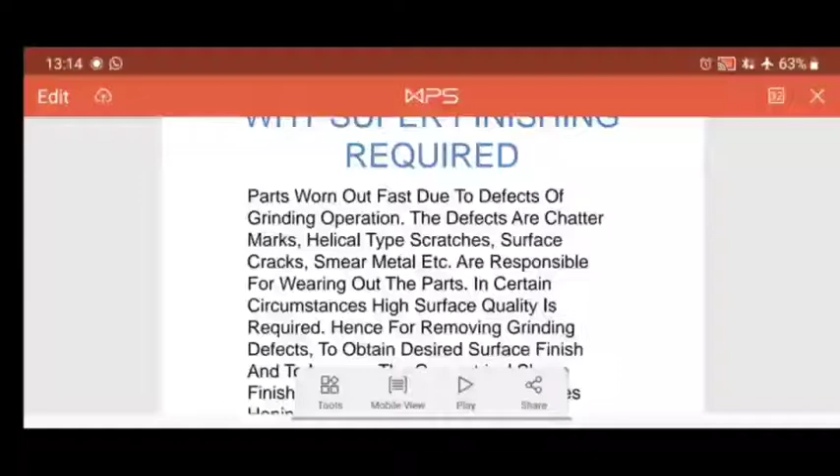So today in this video we will be discussing the super finishing process. So first of all, what is the super finishing process? Can anybody answer? Okay, the super finishing process is nothing but a process in which you get a better finish. So let's discuss what super finishing is. The super finishing process is nothing but a process of making the particular material acquire the best finish.

So basically why do they do this super finishing process? There are different types of super finishing processes. The first one could be honing, the next one is lapping, the next one is micro finishing or super finishing, the next one is buffing, and the last one is burnishing. So basically they do it to make that particular material get the accurate size and also a high degree of surface finish.

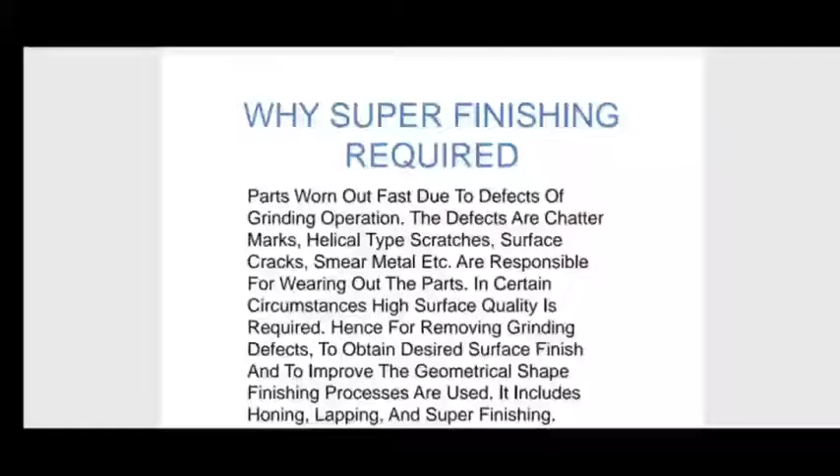So if you take a nut or bolt, when you buy it from the shop, the finish of the nut will be nice. It will be very glossy. It will be very shiny. When you start to use it, it will start to change color and rust will form. So many things will happen. So when we buy any new thing, at the time we purchase it, it would be very nice and very glossy like that. So that is called the super finishing process.

So parts wear out fast due to defects of grinding operations. The defects are chatter marks, helical type scratches, surface cracks, smeared metal, etc., which are responsible for wearing out the parts. In certain circumstances, high surface quality is required, hence for removing grinding defects to obtain the desired surface finish and to improve the geometrical shape, finishing processes are used. It includes honing, lapping and super finishing.

So basically when we take any material, scratches will happen, and scratches are very disturbing. Even when we buy a car or a new bike, if we get a single scratch, we will feel very bad, right? We will feel very unhappy because the product should be very nice and very clear so that the looks will be good. So that is the super finishing.

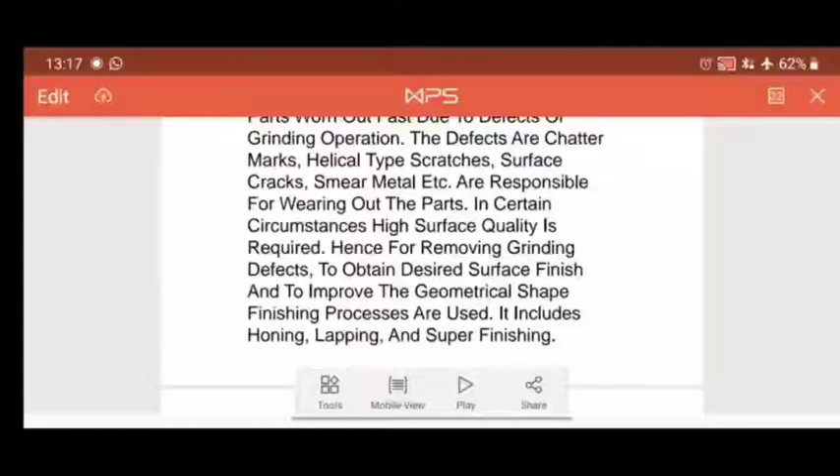When very close dimensional accuracy is required, in addition to high surface finish, the following operations are performed. The first one is the special grinding operation, a process we would have studied in the grinding subject. It shows how the grinding operation is done, and how excess material is ground out of the material to produce the final product.

Next is lapping, a technique we will discuss later. Then there is honing, and next is super finishing.

Whereas in some cases, the primary requirement is only a high degree of surface finish, on the higher side, where only high surface finish is needed. So the desired surface finish is obtained by polishing, buffing, tumbling, and burnishing.

Polishing, everybody knows, basically polishes the material. For example, even if you take a shoe, you get shoe polish. Why do we put polish on the shoe? To get a glossy finish. So on that basis, this happens.

The next topic is the different types of grinding operations, which we already discussed in chapter 4, the grinding process. The important surface finishing operations will now be described in this unit. Typical surface finish operations include honing, lapping, super finishing or micro finishing, buffing, and burnishing. These are the steps we are going to discuss.

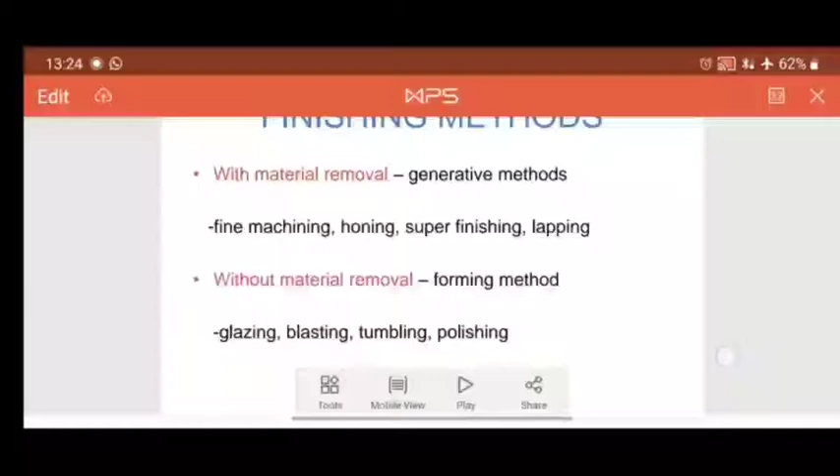Honing is defined by common practices. In that sense, honing is a specific machining and finishing process, usually applied to internal cylindrical surfaces using small bonded abrasive stones. So basically it is used for small bonded abrasive stones. That is the honing process.

Next, we will discuss more about the honing process. So this is honing. Holes made by boring are obtained to the required dimension and finishing by honing. In this process, abrasive stone is used. The dimension, to an accuracy of 0.005 mm, can be obtained by the honing process.

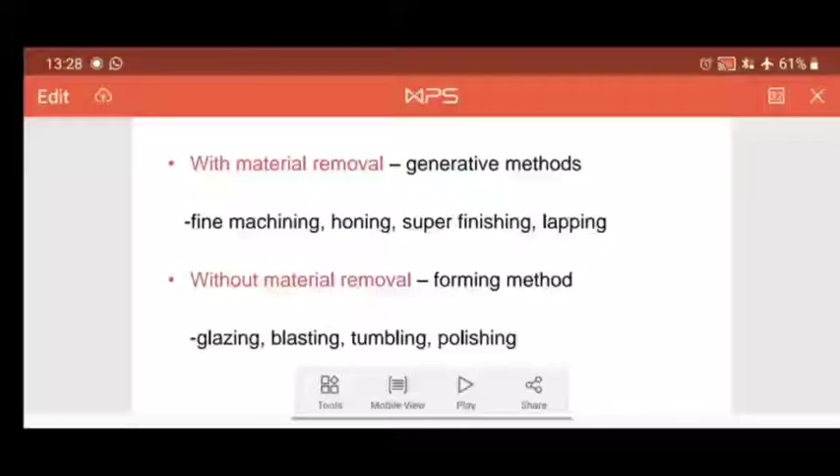Basically, by using this honing process, it is not only meant to do the boring. It is used for boring work where the diameter is very less, but at a lesser dimension also, they are able to do the process. So, using a fixture that rotates and reciprocates, honing is used to correct the geometry and alignment of holes, as well as apply a special surface such as that needed in automobile engines. Basically, this honing process is helpful in order to correct the geometrical alignment of the hole.

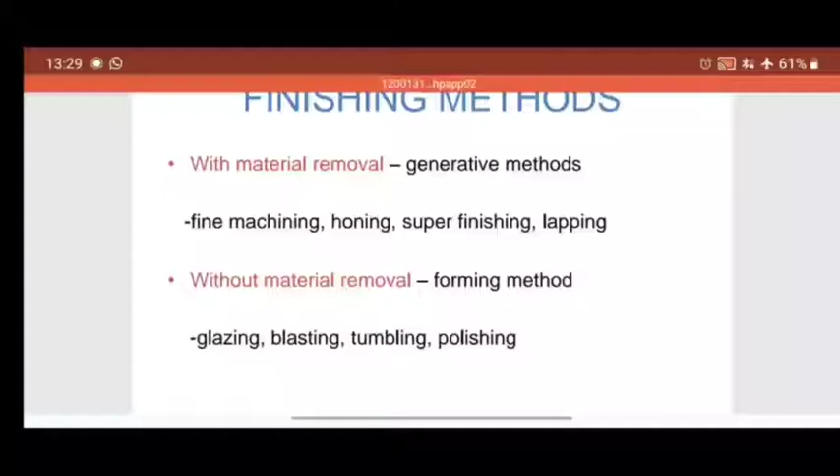So when you take a bore, if you take a bike, there is an engine. In that engine, piston, bore, everything is there. In that engine cavity, the piston will be moving up and down. The piston has a cylindrical shape, and the hole also will have a cylindrical cavity, cylindrical shape, and because of this hole, the piston will be moving up and down. So in this case, by using this process, the hole can be drilled properly so that it can be achieved with good precision.

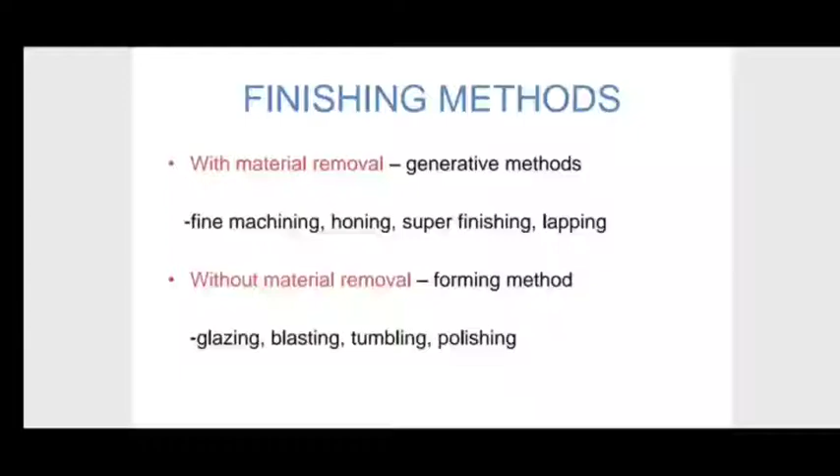Next, the force per unit area varies from 10 to 100 times less than grinding with wheels, and the abrasive grains remain in contact with the workpiece for considerably longer times. Comparable processes include superfinishing, where small stones and light pressure are applied on both ID and OD portions of cylindrical parts. Honing is an abrading process carried out at a low velocity with the help of bonded abrasive sticks. Abrasive sticks is nothing but the abrasive stones. Commonly, it is employed for finishing round holes and curved surfaces. It not only produces a high finish but also corrects slight out-of-roundness, taper, and axial distortion in the work.

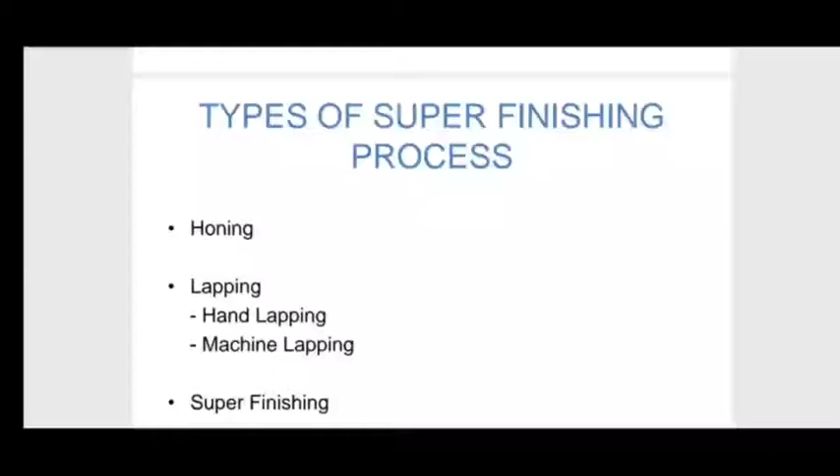Several objectives are achieved by honing. First, metal can be removed easily. Roundness and straightness are obtained, and accurate dimensions can be achieved using this method. A good required surface finish is also obtained by this process.

A high degree of accuracy and surface finish can be obtained, along with relatively high productivity compared to lapping. Because of multiple spindle machines, we can hone multiple holes at a single time, which gives high productivity. Industries prefer this because they require multiple devices to achieve results faster and save time, which is the main important benefit.

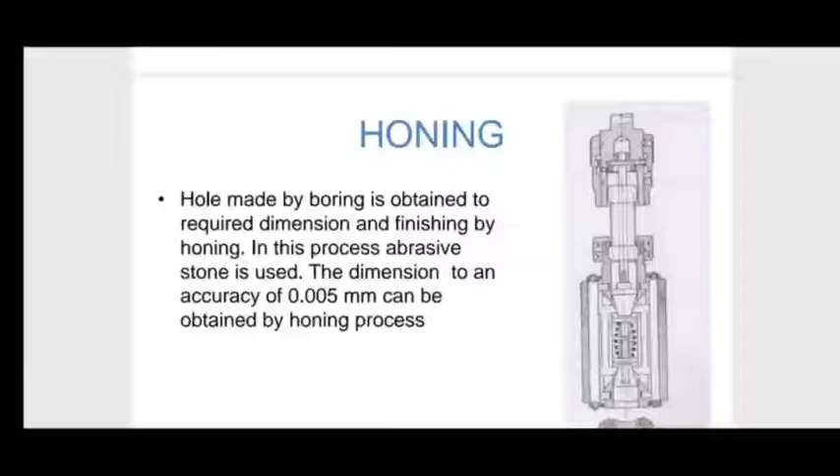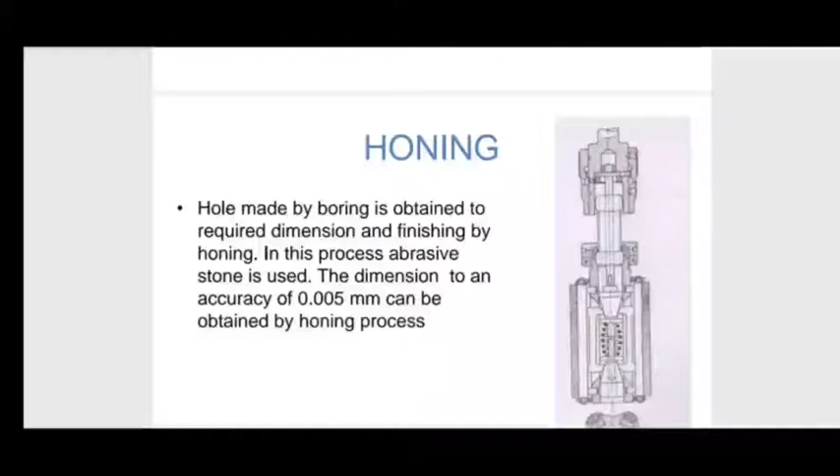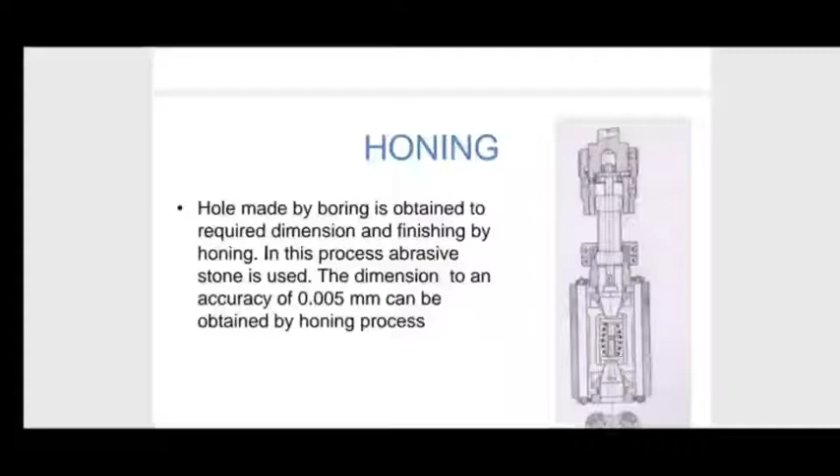There are some disadvantages when honing. Non-ferrous metals cause glazing or clogging of the voids of the abrasive sticks, making them difficult to hone. Honing works well on rough or hard areas, but when glazing occurs, it creates a big problem. It's important to focus on identifying glazing, since glazed non-ferrous materials are very difficult for the honing device to process.

The need for honing includes generating size and limiting accuracy. For holes up to 50 mm diameter, the accuracy is 0.005 mm, while for holes between 50 mm and 150 mm diameter, the accuracy is 0.01 mm. This allows accurate sizes to be achieved, which is one of the good criteria of this process.

So that is one of the new points. Next one is to generate roundness and straightness. Basically honing is used for spherical, cylindrical materials, right? So in that case, one of the most advantageous things is the roundness we can achieve and the straightness we can achieve. When you do cylindrical hollow tubes or a hollow pipe, we can get the straightness, because the waviness can be neglected when we use this type of honing.

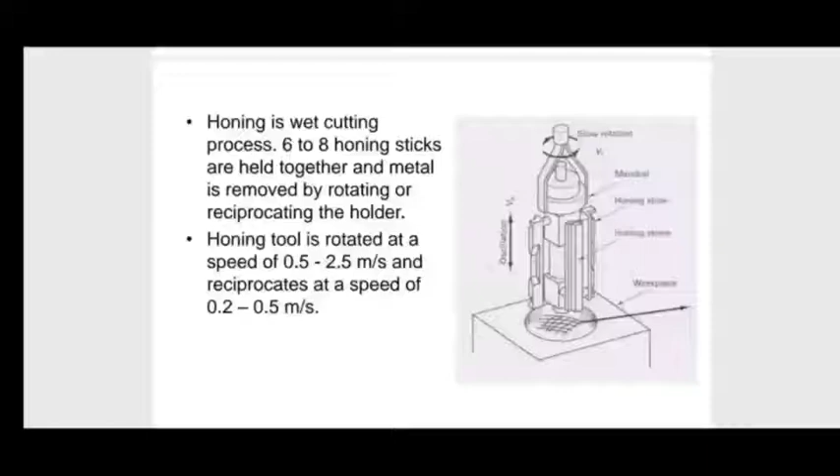To remove metal up to 0.5 mm for primary honing and up to 0.01 mm for secondary or mirror honing. So up to 0.5 mm for primary honing can be achieved, and up to 0.01 mm for secondary or mirror honing can also be achieved by using this honing process, to produce any required surface finish. As we require, we can achieve the surface finish.

Okay? And the applications: honing of automobile cylinders. Automobile cylinders are one of the most important applications currently available. Honing is also used for repair works, basically repairing cylinders, bores and all. Next one is the honing tool. So what is the honing tool?

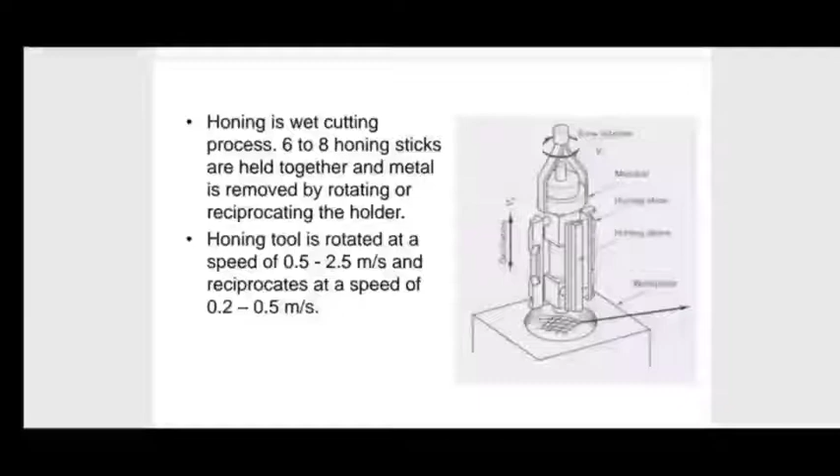It consists of a cylinder or body having 6 abrasive sticks. Now we are seeing about the construction. So what basically will a hone have? Because so many people have this doubt: what is the material they're using, how is it happening, whether they use nylon or something like cloth. Those doubts are common, because we also had the same doubt. But when we see the theoretical part and search for things, then we can find out what honing is.

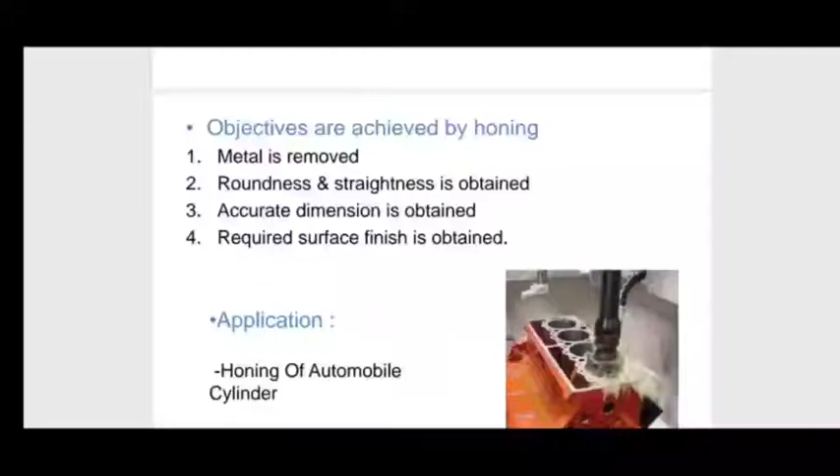Honing is simple. Six abrasive sticks are fixed, spaced around its periphery. The sticks are cemented into holders, each of which is joined to two radial expander pins entering slots in the body.

The holders are held in pairs by springs against the cone member. The hone is engaged to the spindle of the honing machine through a universal shaft. The hone rotates and reciprocates in the workpiece. So basically, the hone rotates and reciprocates.

When the honing tool gets into the bore, that is a hollow space, it rotates and reciprocates, and the abrasive stones touch the inner surface of the cylinder or hole. Once the inner surface touches the abrasive, it gives a good surface. Basically it removes the excess unwanted rough material inside the hole, and we can achieve a better surface finish.

In modern practice, virtually all honing is done with artificial stones. In the olden days they used natural abrasive stones, but nowadays people go for artificial abrasive stones, which give a better result, made by bonding together various fine artificial abrasives. So these abrasive stones are man-made, where several artificial abrasives are bonded together to make the stones.

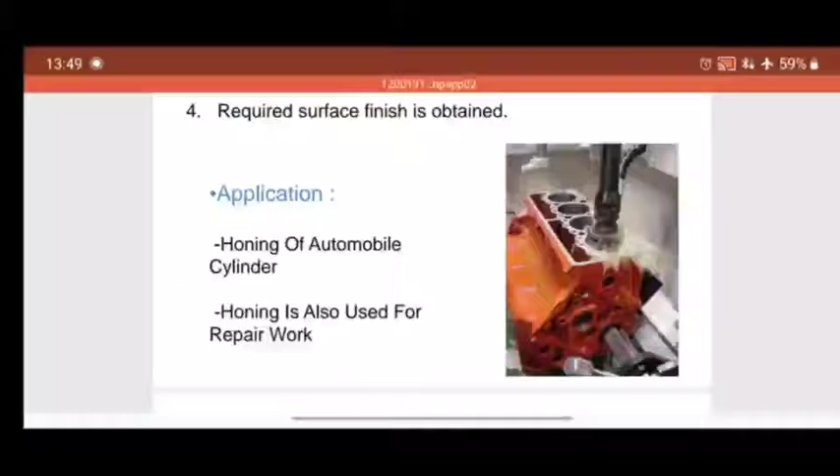So I just want to tell you guys to pray. The only thing we can do is pray, and we should follow the rules and regulations. Government should really implement the rules. They should really focus on how to control this COVID virus, because they tried all that's possible, yes, but still they cannot get rid of it. So I hope you guys will be intelligent and smart enough to understand this and act in a way that goes well.